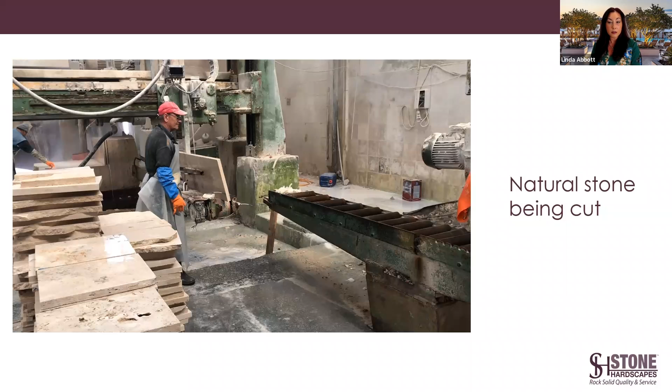The tumbling process to create the tumbled finish is the most popular today, only because it's been out for 20 years, so it's widely used around the country and abroad. All of these finishes pass slip coefficient of friction testing for both residential and commercial use. I just want to make that clear so that you know that when you're using these for exterior projects, they are safe, okay?

So I'm just going to show you a quick little video of the natural stone being cut. And I didn't press the right button, so give me one minute here.

Here you go. So this gentleman, once the stone is cut into large slabs, is putting it on the conveyor belt, and he's going to lay that down, and the wet saw is going to come across it and cut the slab into a paver. He's going to get rid of the waste. And what he's creating here are 24 by 24 pieces of stone.

So each piece of stone is a square cut paver. When he finishes that process, they'll come out looking like this. It's going to be a square edge, saw cut, rectified piece of material that will be started with, and it has to go through the finishing process at this point.

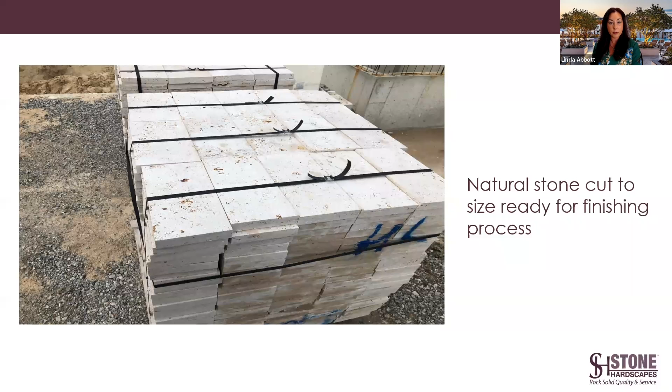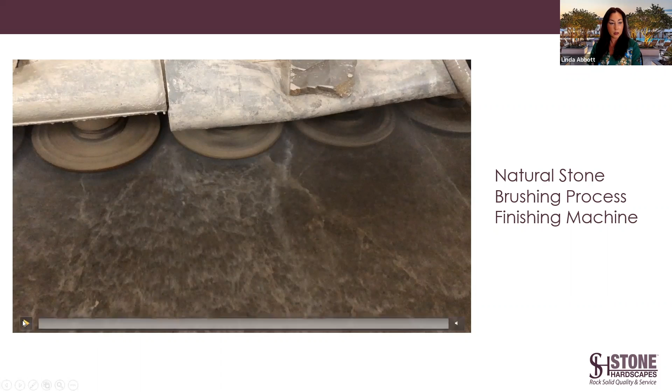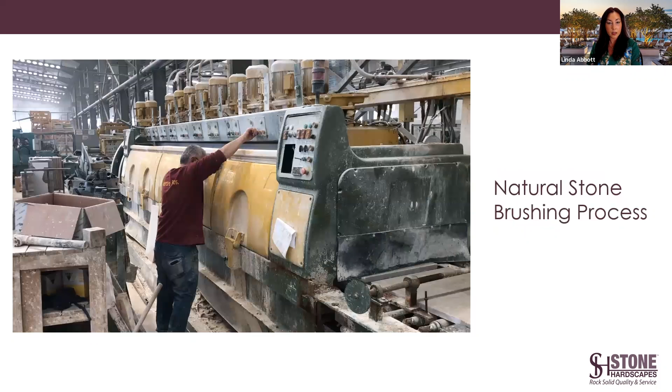The finishing process starts off by brushing the tops of the stone. When you do this, it takes away the saw marks that occur from the last process. So it goes through these machines, and the brushing process is done here. The machines look like this. You can kind of see how that works.

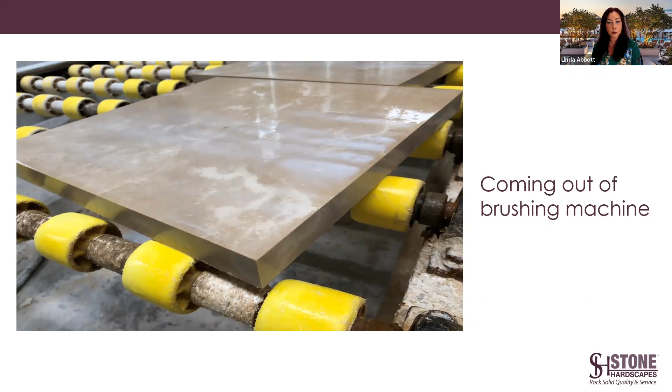So this is all part of the tumbling process. First, the stone gets cut, then it goes through the brushing machines to take off the saw marks that are on top of the stone. When it comes out, you'll have a nice square rectified edge. The tops will be brushed to take the saw marks off.

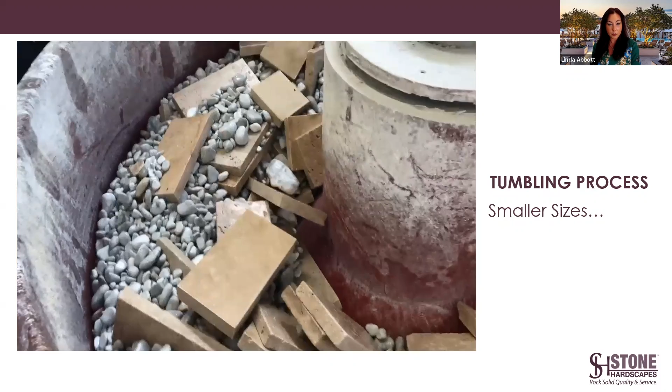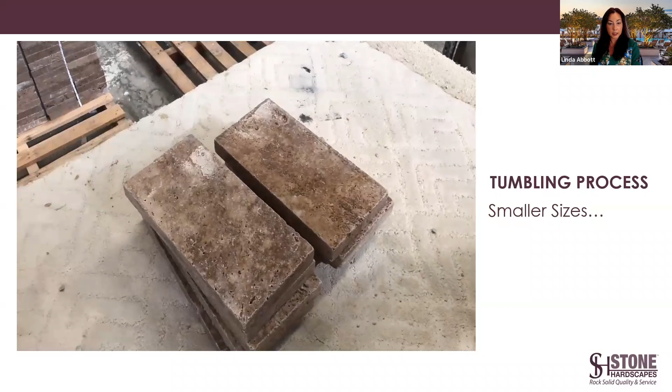Next, it goes through the tumbling phase. The tumbling process has 2 different ways of doing it. This is the smaller size stones going into what looks like a big tumbling machine, or like a washing machine with rocks, basically. The stones will beat up the pavers and soften the edges of the stone. You can see some of them breaking in process, but the finished look will be like this. So you don't have that hard rectified edge anymore, that square edge of the stone.

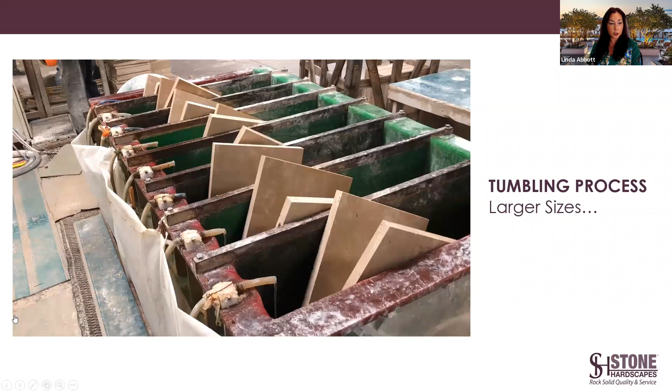On the larger stones, they have to use machines that look like this. There's rocks in there as well, and the machines vibrate and shake around, and the larger pieces of stone go around in them. So the finish on top of the stone will be tumbled, and the edges will be softer and not so rectified.

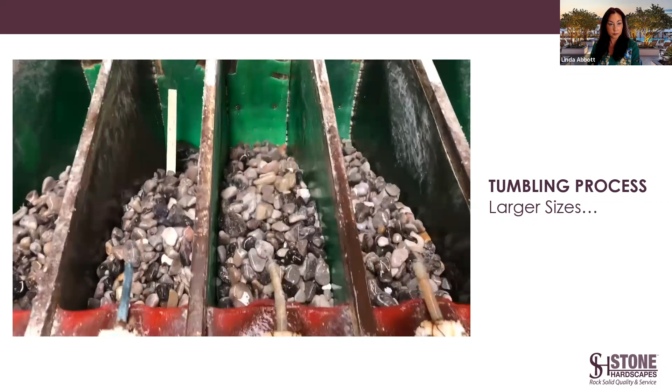The stones will come out looking like this at the end. You'll have a softer finish on the edges. The tops will now be finished and tumbled, so it'll pass the slip coefficient of friction testing.

This is also important for when you are doing a sand set application instead of a mud set application. Those softer edges give forgiveness when the sand shifts underneath. So you don't have the lip edge across a pool deck, for example, that you would have if using a rectified stone, which is not suitable for exterior sand set application.

The next finish that I wanted to show you that is very useful for exterior use is the extreme grip finish, or what some people call the sandblasted finish. This is great if you want a lot more grip than what the tumbled finish can provide for you. And I'm going to show you how this is done.

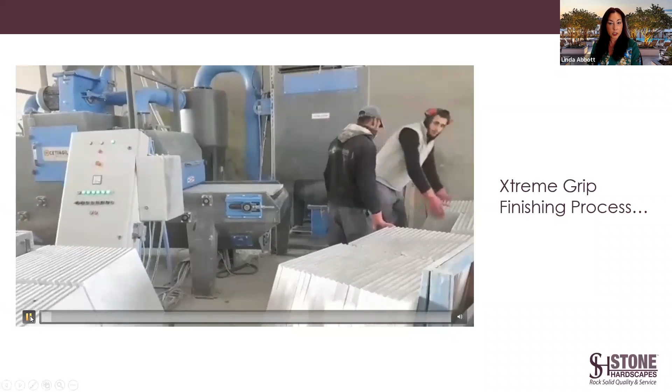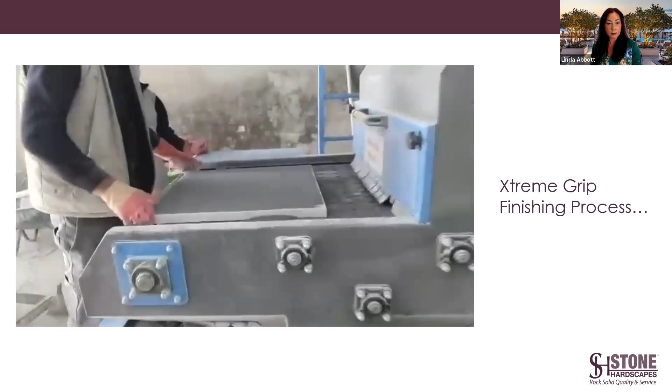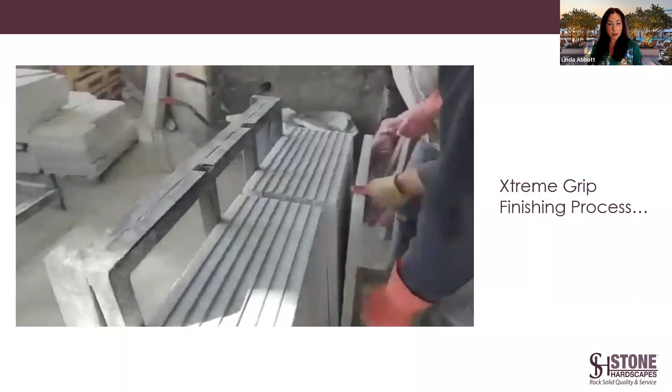So in the extreme grip finishing process, once the stone goes through the regular process I showed you before, it's put on conveyor belts, and sand is put in those machines, and they beat up on the tops of the stone. That's them pushing the sand off the stone and moving it to the next area. I'm going to show you another video with a closer look.

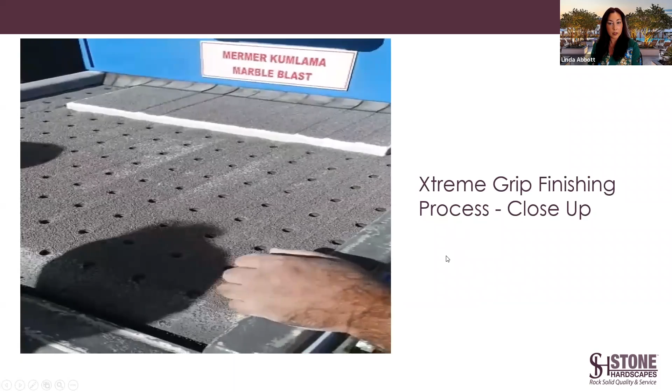So this is sand all over the stone. You'll see it coming out over here. They call this blasting the stone overseas. So it comes out looking like this.

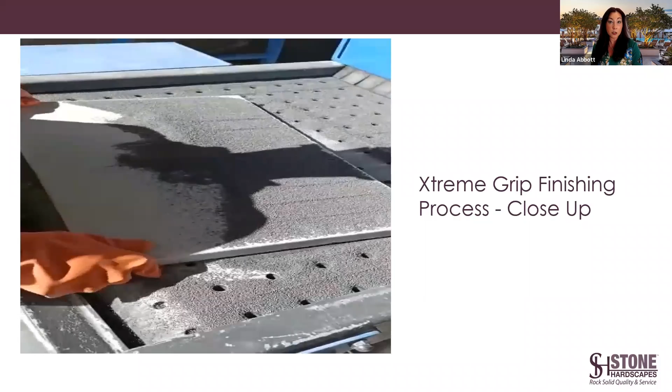They're going to show a close-up picture. As you can see here, you see the divots in the stone. That gives it more grip. It almost has a pumice stone feel to it, and it really makes the stone have the extreme grip.

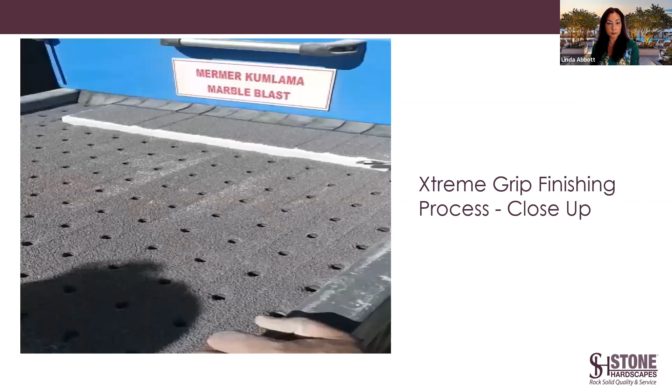Pretty cool. Great for assisted living facilities. So if you want to use a natural stone in a place like an assisted living facility, you don't have to worry about it being slippery at all. That's the finished look.

The next one I wanted to share with you is the leathered finish. This is also a newly popular finish for stone. It's actually a combination of going through the tumbling process and brushing, as well as the extreme grip process I just showed you. What they do is first sandblast the stone, and then lightly brush it. That leathered finish has texture to it, and it's a very interesting and beautiful look that appears on the stone.

I also wanted to mention that the tumbling process has been out for over 20 years, and it's the most popular because of that. The extreme grip started mostly in the Northeast, so they're used to the sandblasted material up there, and it has become very popular in that area. In regards to the leathered finish, that kind of started over in Florida on the West Coast, and it's become very popular over there. So it kind of moves across the country, depending on the exposure of it.

Combining textures to achieve unique designs. This one shows the Extreme Grip paver, which is the whiter of the two colors here. On a driveway application, they combine the Extreme Grip paver as well as the tumbled paver to give it a unique look, and the overall finished project looks really unique because it has some texture to it in some spaces.

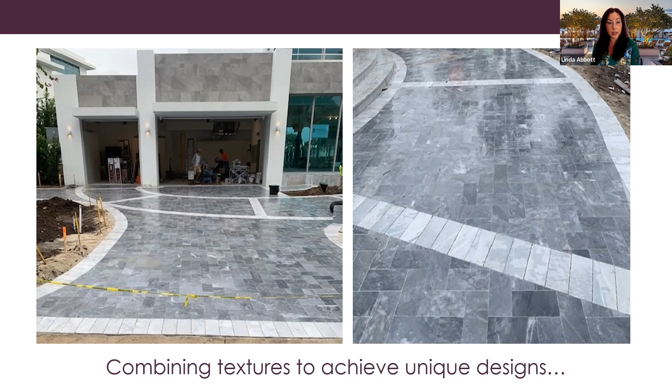It's just pretty cool how this is the same exact stone in a different finish, which changes the look of the stone.